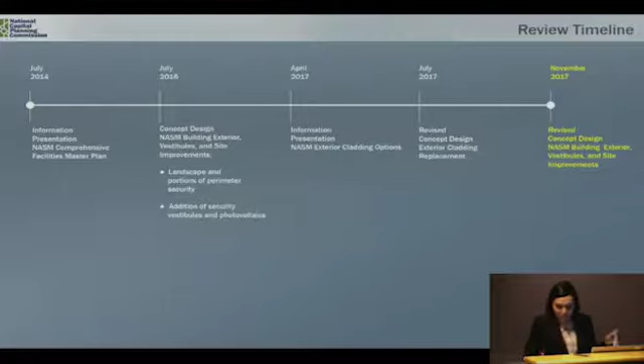So Smithsonian has submitted a revised concept design for the terraces, landscape, and security vestibules at the National Air and Space Museum. This submission is part of a larger revitalization project. Since 2014, the Commission has provided feedback on 2 information presentations and 2 concept designs, and as the Chairman mentioned, the Commission has also conducted 3 site visits to the museum.

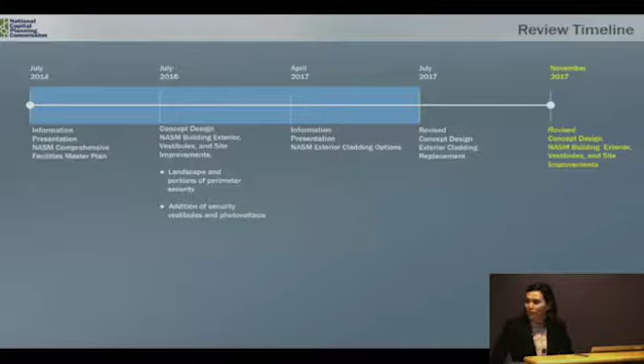In July 2016, the Commission reviewed the first concept design, which focused on the site improvements and security vestibules. Then, in July 2017, the Commission reviewed a revised concept that analyzed the building exterior stone cladding replacement options. Since the last review, Smithsonian has significantly reduced the project scope due to budget constraints. So today, we will describe the changes on the concept design, and the Smithsonian anticipates coming back for preliminary and final review in February 2018.

The project has 6 objectives: first, provide adequate waterproofing and structural support for the building; improve access and visibility between the museum and the National Mall; create a welcoming environment for visitors; provide programming on the museum grounds; reinforce the landscape; and accommodate increased visitation growth.

Here is the existing site plan. If you recall, the museum site is approximately 10 acres. The building sits on a terrace surrounded by planters, which respond to topography changes.

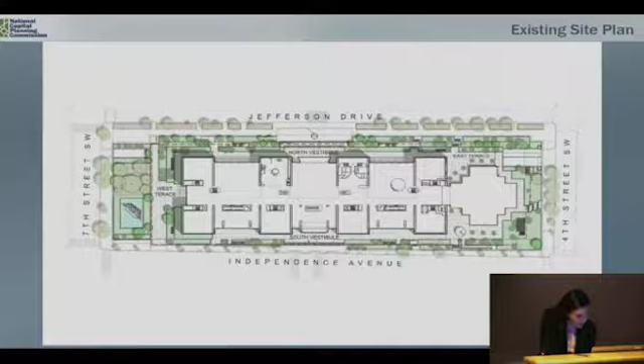So the topography of the site generally slopes from southwest here to northeast here. The southwest is the highest point and is at the same level as the sidewalk, the 7th Street sidewalk, while the northeast corner is the lowest point, and you can see there the terrace is about 6 feet in height. Stairs and ramps provide access to the building from the street level.

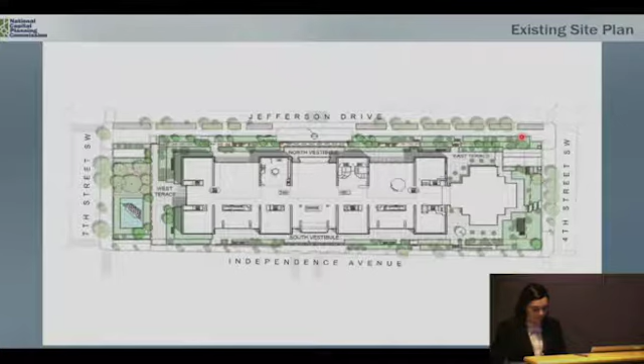The building terrace, which you can see highlighted in blue, must be replaced to address waterproofing issues affecting the underground parking. The red dashed line shows the extent of the basement footprint.

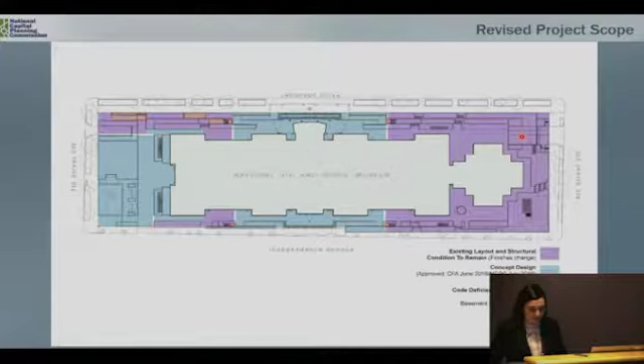So here is a diagram of the revised project scope. The blue color represents the extent of the changes to the existing terrace, which now focus on the north and south entrances at the center of the site, and also the west end of the site. The purple color shows the existing areas that will remain.

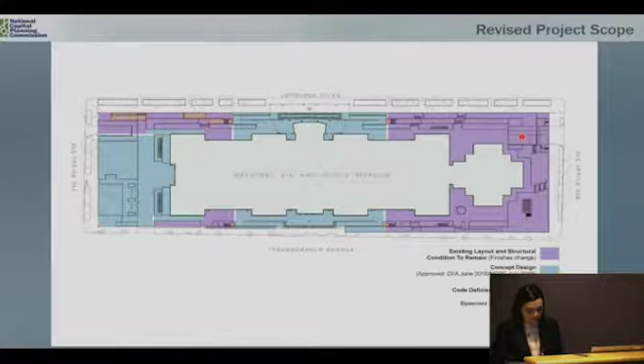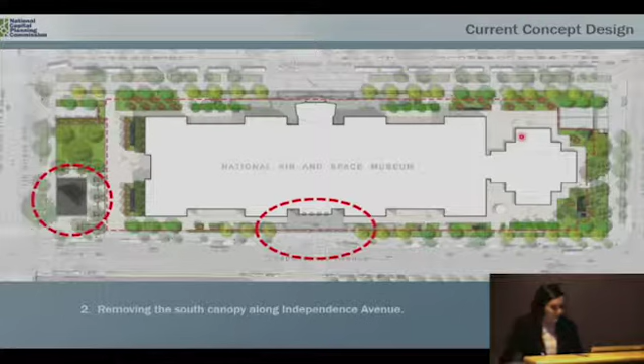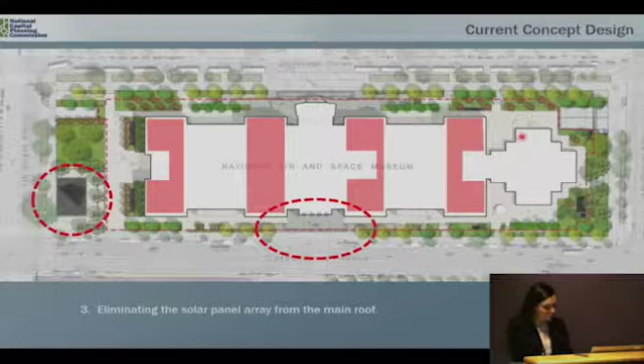The design team is now proposing 6 major changes to the previous site plan based on value engineering. The changes include: eliminating the fountain of the Delta Solar sculpture, changing the sculpture setting from a wet to a dry plinth; removing the south canopy along Independence Avenue; eliminating the solar panel array from the building's main roof; removing the corner entry plazas, in particular on the east end of the site; increasing the tree spacing, as you can see here, which results in fewer trees; and revising the terrace paving materials.

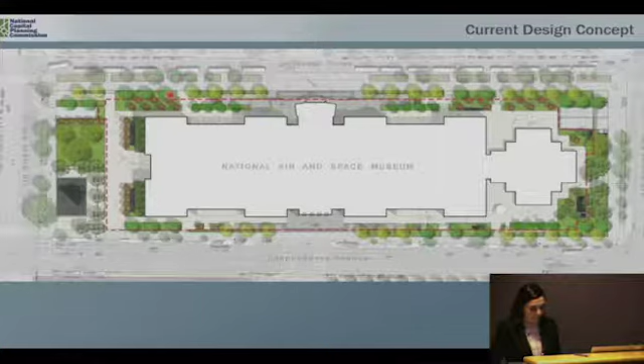Here is the latest plan. As I mentioned before, the tree spacing has increased from 30 to 45 feet on center to provide better growth conditions and solar access to the ground plane. As such, fewer trees are proposed in this concept.

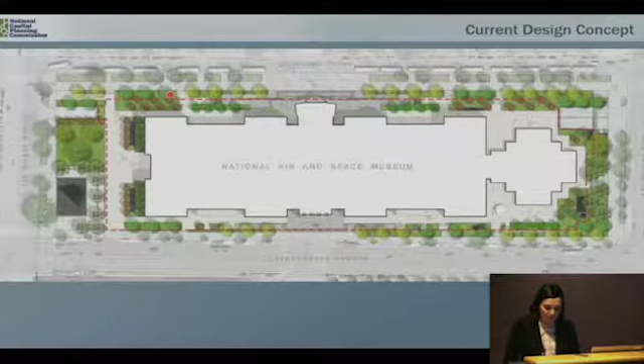So now, as I explain the design in more detail, I will share our analysis. The staff analysis has been organized in two main categories: the west end of the site and the overall site.

Moving on to the west end of the site, staff finds that the west end, which contains the Delta Solar sculpture, presents a significant opportunity to provide an active plaza space for the 7 million people who visit the museum per year. If successfully designed and programmed, the hardscape plaza could serve as an effective counterpoint to the expansive lawn of the National Mall and contribute to the experience along 7th Street, which directly connects downtown to the waterfront.

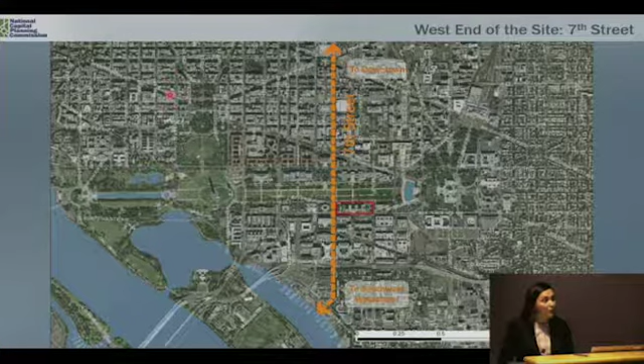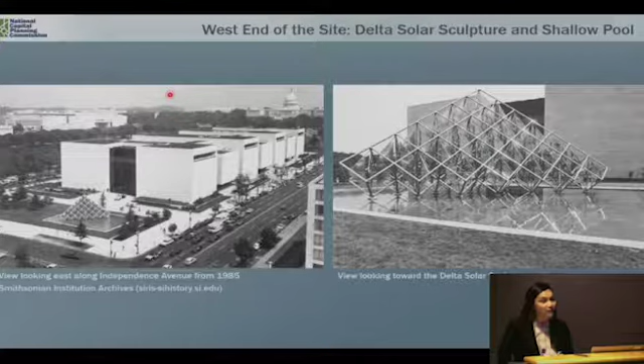Here you can see pictures of existing conditions. You can see the empty, shallow pool.

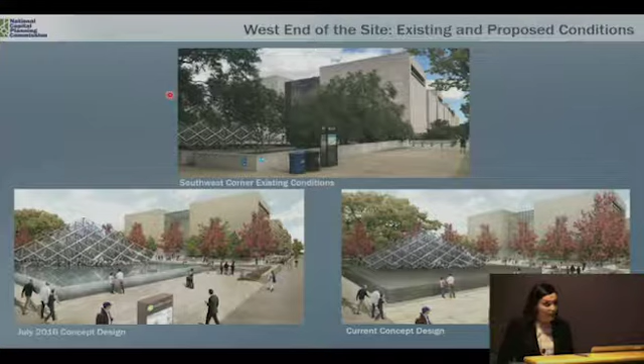Staff notes that the July 2016 concept design, shown on the bottom left, included the relocation of the Delta Solar sculpture closer to the corner of Independence Avenue and 7th Street. The proposal included the replacement of the shallow pool with a plinth that had a similar proportion to the original pool. The plinth functioned as a water feature and an integrated perimeter security measure for the base of the sculpture. The picture on the bottom right shows the current design. As you can see, the water feature has been eliminated, but the proposed plinth remains in the same location as the previous design.

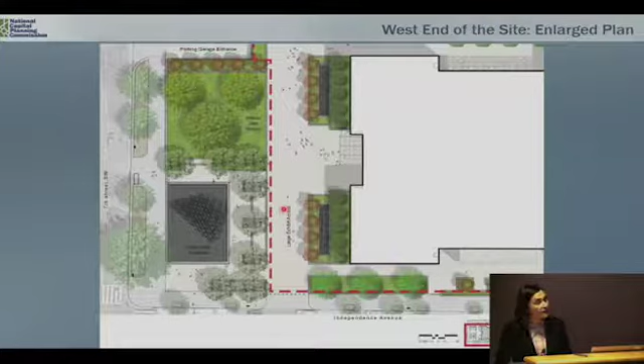Staff also notes that since the project submission to NCPC and the Commission of Fine Arts review two weeks ago, the Smithsonian has committed to retaining a water feature for the Delta Solar, which will be incorporated into the preliminary and final design. I note that we have reflected this change on page 4 in the amended EDR.

However, staff's recommendation regarding the design of the plaza is still relevant. Staff recommends that the Smithsonian consider how this portion of the site could reinforce the network of active gathering spaces along 7th Street and provide an amenity for the visitors of the museum.

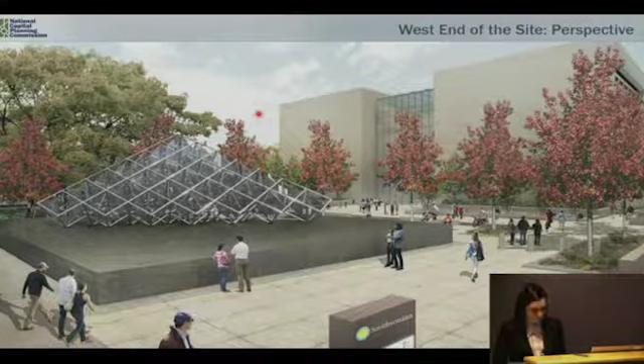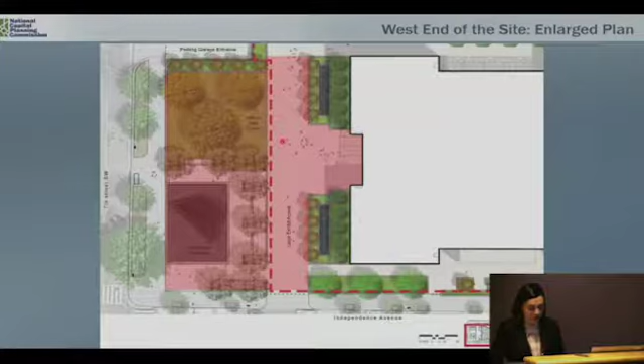We also recommend an integrated public space that incorporates the adjacent large exhibit access area, which is here, as part of the plaza composition, as indicated in red. Staff also recommends the Smithsonian evaluate the perimeter security along 7th Street at this edge to allow greater accessibility and visibility into the plaza and integrate elements that also function as public amenities.

Moving on to the overall site. As you may recall from previous site visits, there is a lack of seating around the perimeter of the site and not enough bike racks.

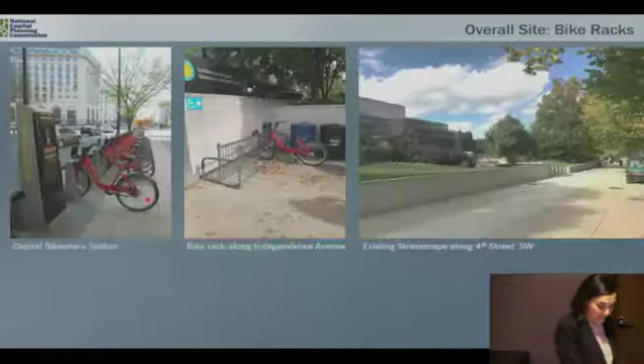As the design develops, staff requests a streetscape plan that incorporates the following amenities: benches located near bus stops, building entrances, and terrace corners at the sidewalk and terrace levels, bike facilities such as bicycle racks and a Capital Bikeshare station. Staff also recommends that the Smithsonian work with the National Park Service to improve the streetscape surrounding the museum consistent with the National Mall Streetscape Manual where applicable.

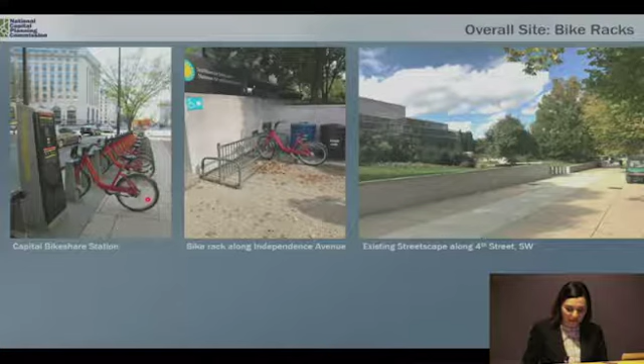The proposed design relocates the Ad Astra sculpture further to the north towards Jefferson Drive.

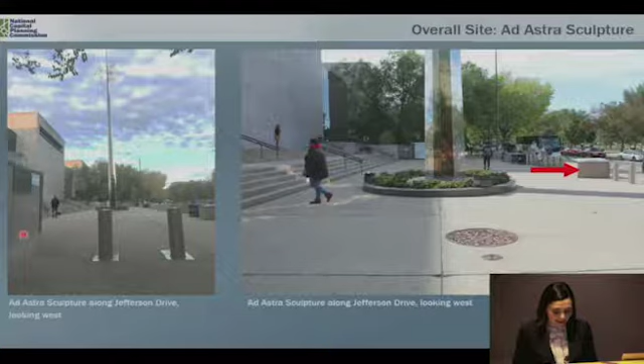The stairs will move further to the north to align with the existing terrace walls, and staff recommends that Smithsonian coordinate with NPS regarding the relocation of the Ad Astra sculpture to the sidewalk space along Jefferson Drive, ensuring that the placement does not disrupt pedestrian flow and provides sufficient clearance for bus drop-off and pickup areas.

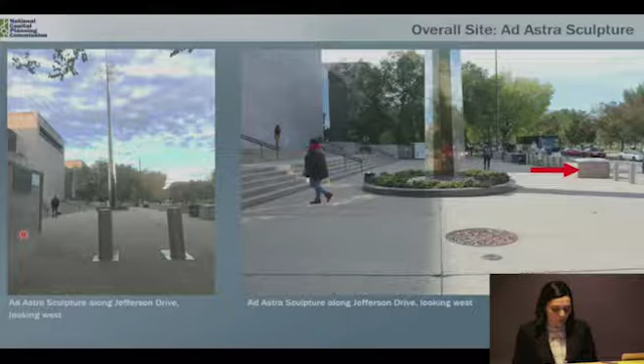Regarding landscape, staff notes that all paving, soil, and systems need to be removed to replace the terrace roof waterproof membrane.

147 of the 151 existing trees will be removed. 4 trees will remain, highlighted in red, located on the east and west ends of the site, outside of the basement footprint. The proposal includes planting 116 new trees, in addition to the 4 trees that will remain.

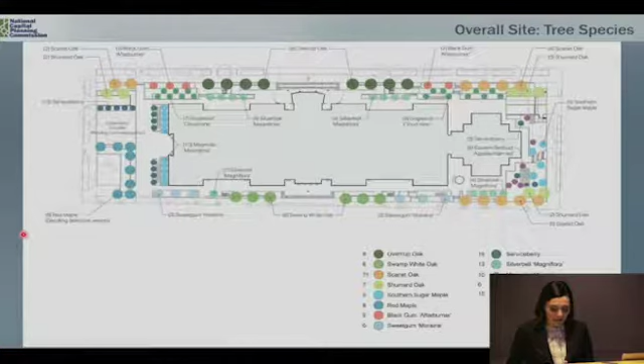This is 31 trees less than what currently exists today. Therefore, staff requests that the Smithsonian submit landscape plans at preliminary review that include tree replacement to prevent net loss of tree canopy, in accordance with the procedure established in the policies related to tree canopy and vegetation in the comprehensive plan for the National Capital.

In terms of paving treatment, the design team has revised the terrace paving material from granite pavers to exposed aggregate concrete in the areas shown in light gray. The dark gray shown at the museum entrances will continue to be granite. You can see an enlarged plan of the proposed pavement treatment.

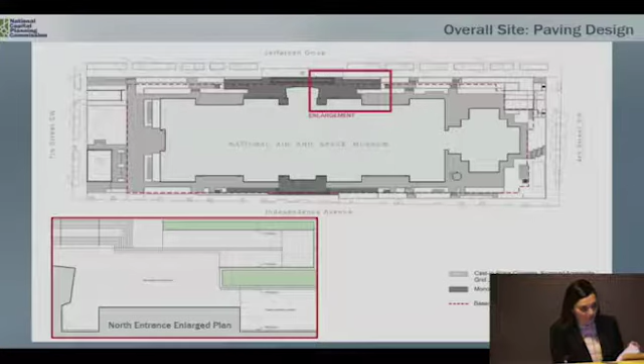I think it's frozen. Okay, thanks.

Moving on to the security vestibules, overall the north canopy continues to have the same form and materials. And the Smithsonian has provided an updated lighting approach that respects the Capitol at night.

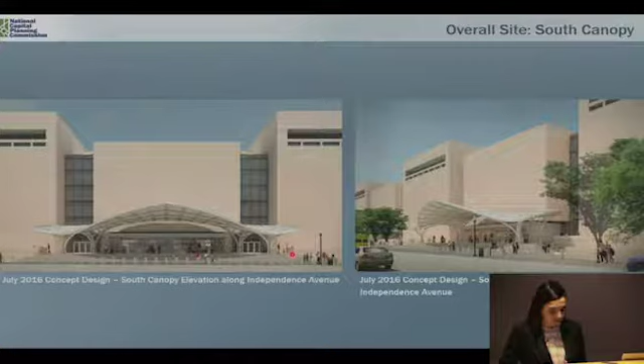You recall the last concept included a canopy on the south side of the museum. To accommodate the canopy, the Smithsonian removed the existing Continuum sculpture, which was placed there in 1976. The design no longer includes the canopy.

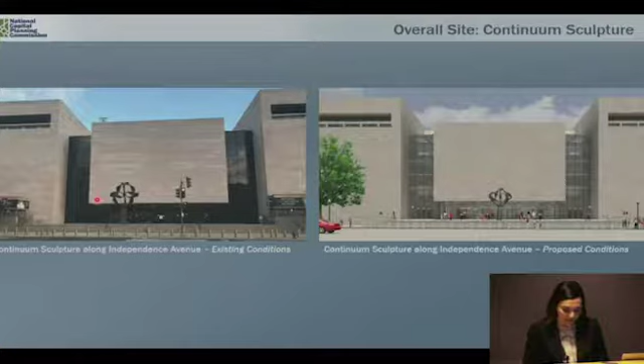The design team is proposing to keep the Continuum sculpture at the south entrance, but slightly relocate it to the center of the building. You can see that in the existing conditions, the sculpture is off-center and approximately aligns with 6th Street.

Lastly, the current design eliminates the solar panels previously proposed on the building roof, due to the potential impacts to the building structure and associated cost implications.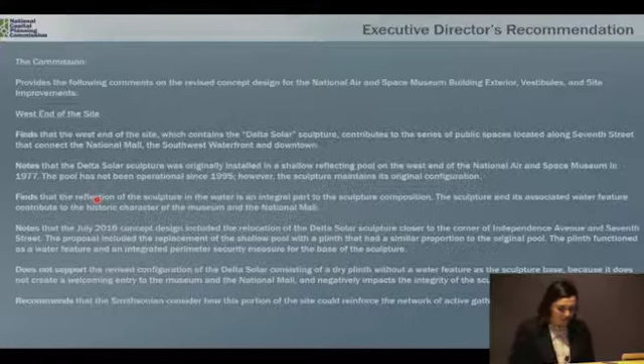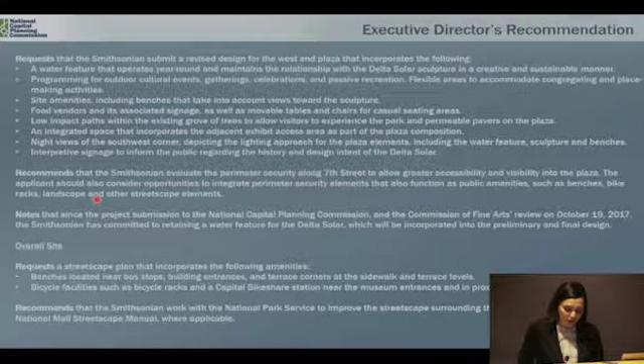To conclude, it is the Executive Director's recommendation that the Commission provide the comments discussed throughout the presentation, including those related to the Delta Solar sculpture and improving the plaza at 7th Street and Independence Avenue, by incorporating additional site amenities, a year-round water feature, and expanding the plaza to incorporate the adjacent exhibit access area.

Notes that since the project submission to NCPC and CFA's review on October 19, 2017, Smithsonian has committed to retaining a water feature for Delta Solar, which will be incorporated into the preliminary and final design.

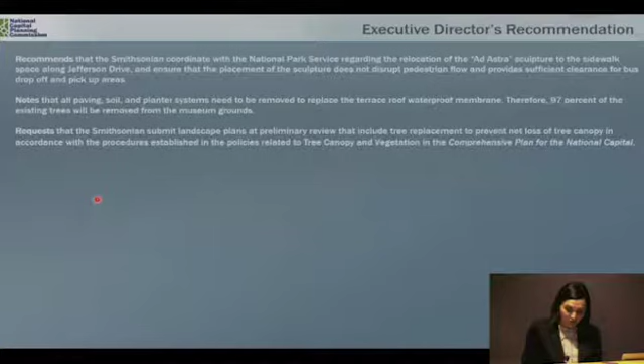Regarding the overall site, we request a streetscape plan that incorporates site amenities such as benches and bicycle racks. We recommend that Smithsonian coordinate with NPS to improve the streetscape surrounding the museum and the relocation of Ad Astra. We also request Smithsonian submit landscape plans that include tree replacement to prevent net loss of tree canopy, in accordance with the procedures of the comprehensive plan.

And with this, I conclude my presentation. I'm available for questions the Commission may have, and the design team and Smithsonian are here.

Thanks. Thank you, Ms. Lee, very much. Are there questions or comments? We note that Ms. Trowbridge and her team are here, and I would hasten to remind you that, as Ms. Lee noted, there is an addendum to page 4.

Mr. Shaw. Thank you, Mr. Chairman. I have a question on the solar panels. Is there a way for us to approve them, so that if you don't use them, they're still approved if you ever want to use them in the future? With administration priorities around these things, it seems like something you'd want to have approval for at some point, rather than coming back to us to approve something you could have had approved already. Does this make sense?

Okay, I'm saying keep the authorization if you can. I'm concerned that even if you don't build it, you could have built it, and we knew you could have built it—so can we keep you having the chance to build it?

Can we give you more flexibility? That was a very nice way of saying it. Please allow us, that's why you're...

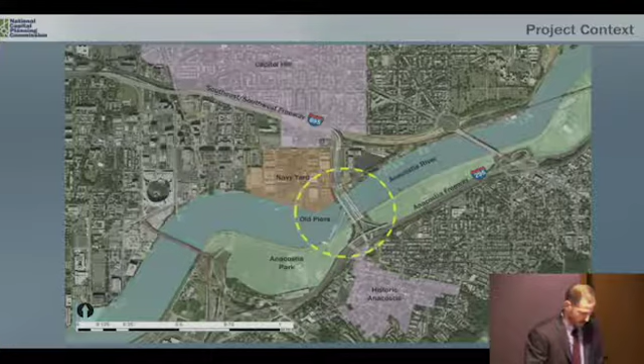As a reminder, the park will be located in southeast Washington, D.C., highlighted here circled in yellow. This is immediately south of the Navy Yard and just north of Anacostia Park, which is controlled by the National Park Service, as well as historic Anacostia. The project goal seeks to reuse the existing piers from the old 11th Street Bridge, which cross the Anacostia River at this location, and create a new civic destination in a park that connects the surrounding communities.

By way of history, the Commission in 2011 approved the final design for the replacement of the old 11th Street Bridge. That project replaced a pair of 40-year-old bridges which crossed at this location to allow for safety enhancements and new ramp structures. You can see here the plans for that project which the Commission approved. On the left you can see that old configuration, and on the right, the new bridge configuration, which has since been built and is operational.

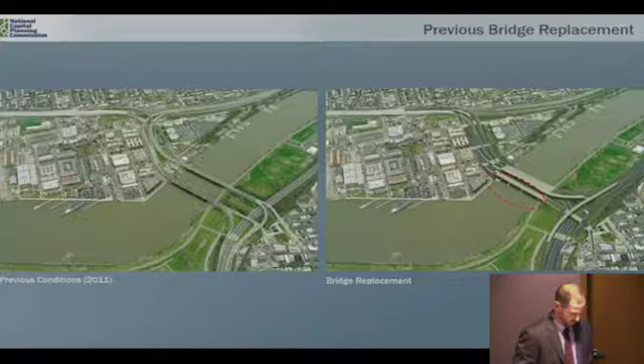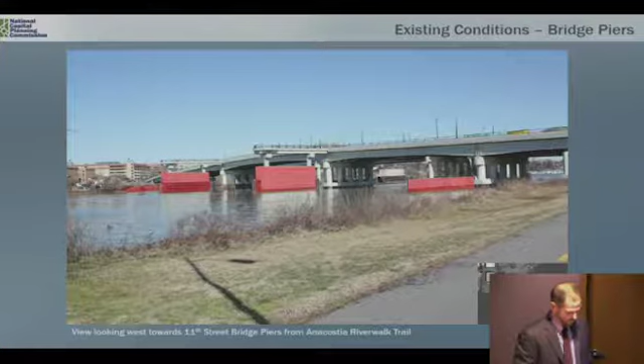The old downstream bridge infrastructure, circled in red here, is the site of the proposed bridge park. This view from the river shore shows the Anacostia Park, where you can see the existing piers, highlighted in red. Following the information presentation, the project team conducted a feasibility study to further the design and also evaluate those existing piers. Through that study, DDOT found that the piers were in good condition. However, the loading demands expected by the initial design exceeded their capacity. As a result, the park design has been modified due to these changes, but also as the project program and other needs have been identified and developed.

The proposed park, to give some context, will be accessible via a variety of different transportation modes. The Anacostia and Navy Yard metro stations are both about a 20-minute walk. Of course, bus service is pretty frequent in this area as well.

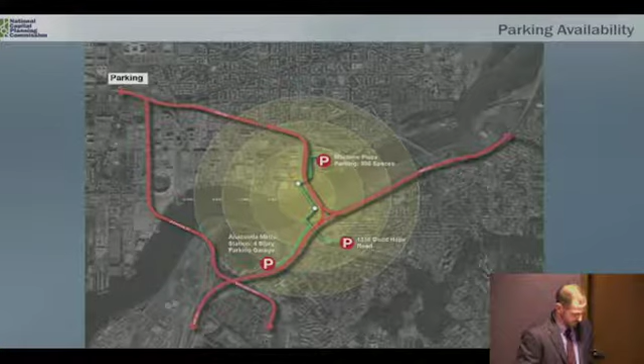No new parking will be provided for the park. However, there are several parking garages in the area, including the Anacostia metro station, which is to the southwest.

The park has 4 goals, which you heard previously: creating a healthy community by establishing a safe place for residents to exercise and play, connecting the community to the Anacostia River, connecting the neighborhoods of Anacostia, Fairlawn, Capitol Hill, and Navy Yard, and also generating new jobs and economic activity.

From the beginning, community engagement and feedback has been a critical part of the design process in developing principles and programming concepts. The Bridge Park, therefore, symbolizes a new connection across the river, stitching together booming areas of the city and those that had been previously overlooked. The park is also an example of the city working together with residents to create this new vision.

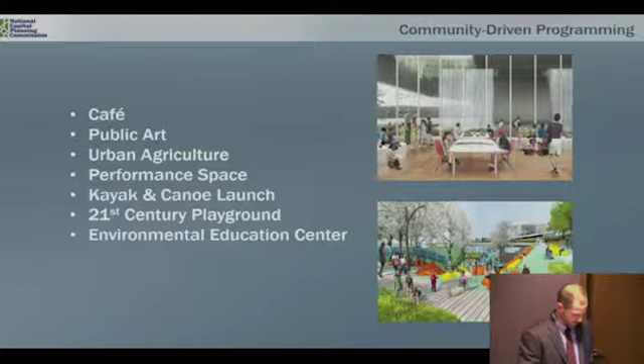Through the engagement process, a number of proposed uses were identified, and these are listed here on the screen in front of you. These have been incorporated into the park design, including outdoor performance spaces, public art, playgrounds, urban agriculture, and classrooms.

In March of 2014, the 11th Street Bridge Park staff organized a nationwide competition, which was in part informed by those over 400 community meetings. Over 80 design firms submitted proposals, and after several months of the selection process, the competition jury selected the design by OMA and Olin.

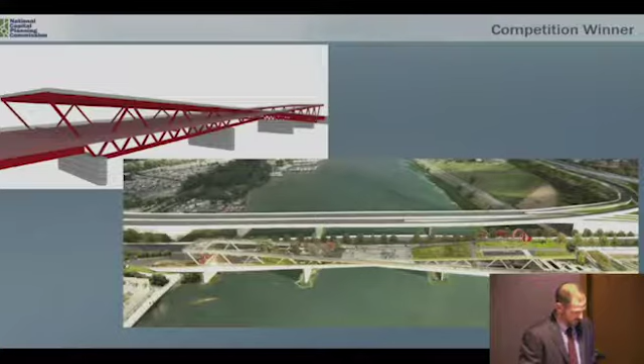As I mentioned, the project team conducted a feasibility study of that winning entry and has further evaluated the existing piers. The resulting design, which I'll walk you through today, is substantially similar to the original concept, with the major project components retained, but the design has been slightly modified.

So for comparison, I'll walk you through a few slides. First, an aerial view of the winning design. And then here's the current design. You can see the bridge has been narrowed somewhat.

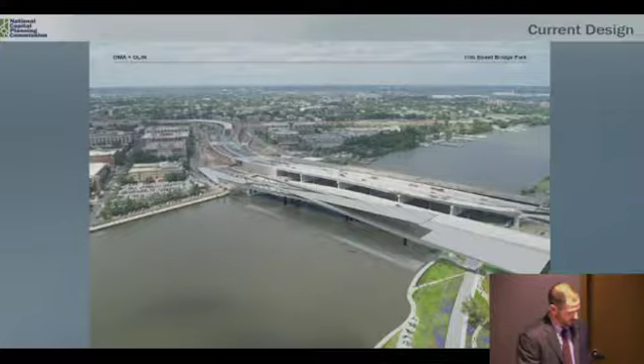Here's a rendering of that winning design, looking basically to the north. And then here again is the new design, very close to the winning entry, just narrowed slightly. Here's a view looking from Anacostia Drive to the north, and then here's the updated concept, which is before you today.

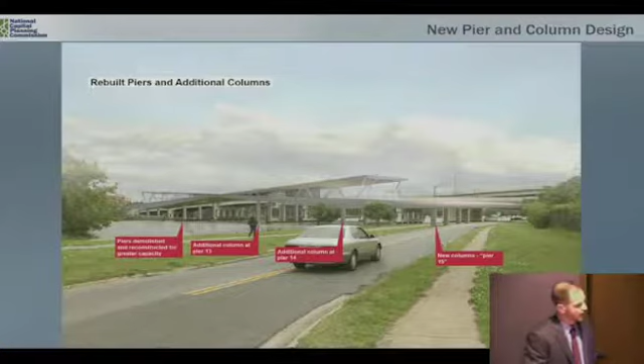Again, based upon that feasibility study, a new multi-column pier as well as 2 additional support columns have been added to the bridge structure to help support the overall program.

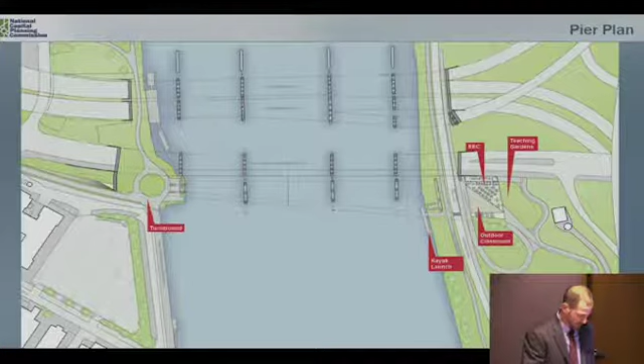Walking quickly through the components of the plan, I'm going to start at the roof level. This includes gardens, lookout areas, as well as open gathering spaces. The bridge deck level will incorporate an amphitheater, cafe, and play space. And then at the pier level, where it interfaces with the ground, the park will include park space, an education center, outdoor classroom, as well as a kayak launch area.

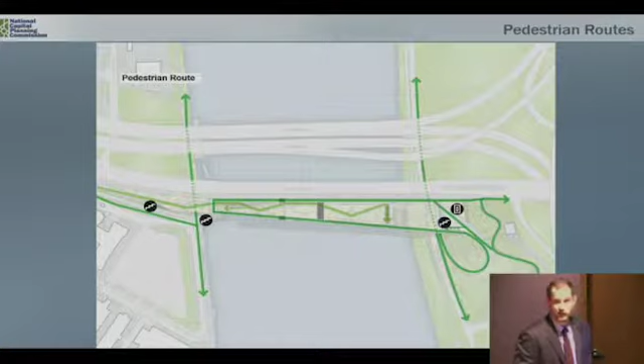The revised design concept also further promotes pedestrian and bicycle access. From the north side, pedestrians will access the bridge from the landing adjacent to the Navy Yard, as well as the existing 11th Street Bridge. On the south side, the bridge connects to the adjacent grade, and paths and ramps allow access down to Anacostia Drive, Good Hope Road, and Martin Luther King Jr. Boulevard. On the screen here, you can see highlighted in green those access routes.

Staff believes both the north and south bridge landings are critically important to allowing access to the park. These connections should be clear, safe, and comfortable for all park users. We understand that the applicant is going to continue to develop the details for these connections prior to preliminary and final review by the Commission. In particular, the pedestrian bicycle connections from the bridge across Anacostia Drive in that area should be improved, as the trail is located north of a road and would require a crosswalk at grade.

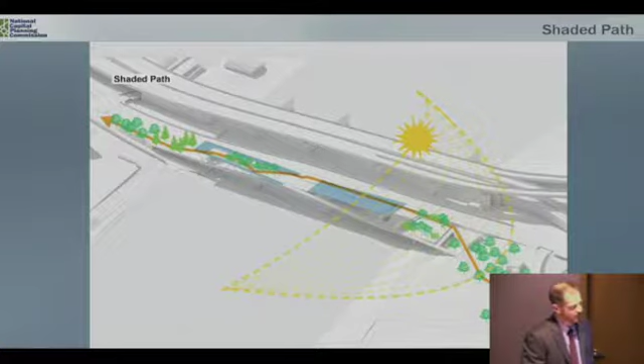Because the bridge is elevated, another important issue is protection from the sun. The team has therefore emphasized a shaded route across the bridge, including both built elements as well as landscape features to provide that path.

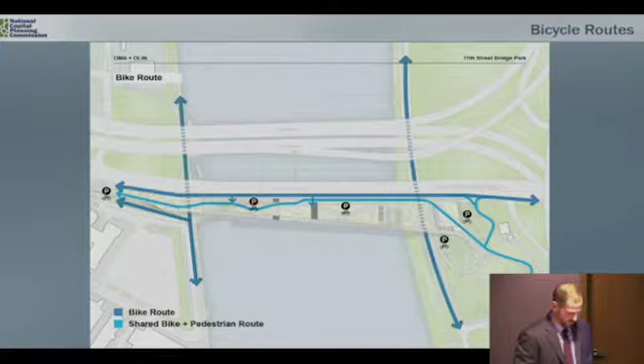Through bicycle access will be primarily along the existing 11th Street Bridge, which is on the top part of the image, although a shared bicycle pedestrian path will allow direct access to bridge programming. Connections will allow both bicycles and pedestrians to cross over from the existing bridge to the bridge park. Here's another view that shows those connections, so the grades have been reconciled at these locations to allow that interface to happen.

In addition, the design has been updated to provide clear routes for emergency egress and life safety, and those are diagrammed here. These are additional program analyses that have happened since you last reviewed the project.

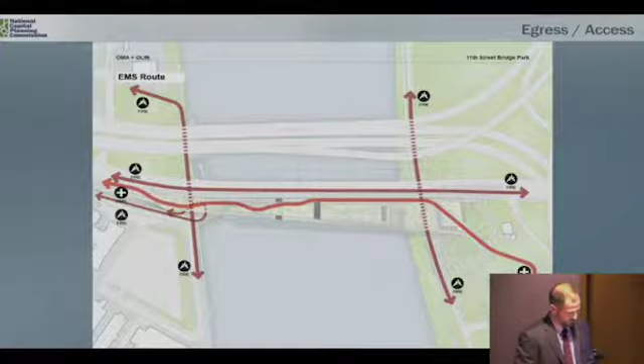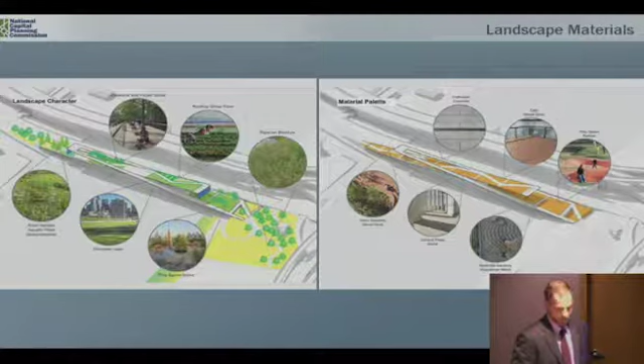Finally, as the design is further developed, additional information regarding the proposed lighting strategy will be particularly important. The bridge will be seen from a variety of locations at some distance, and as such, the lighting level should be appropriate to meet the design needs while minimizing excess light, as well as upward and horizontal light spillage. Staff recommends the applicant prepare a lighting plan, including fixture details, color, illumination, and renderings for inclusion in the next submission.

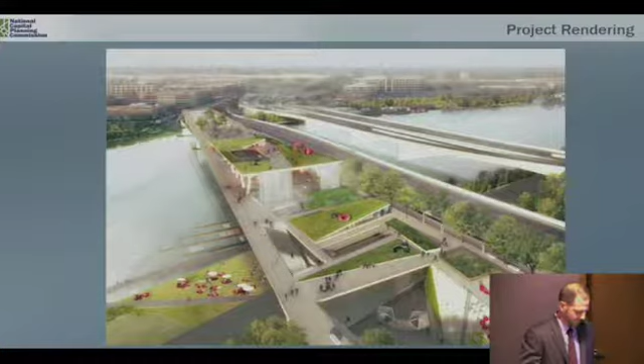The proposed bridge park intends to create a welcoming and vibrant space that enhances the user experience and fosters civic and local uses. Staff finds that this is consistent with many of the policies in the comprehensive plan. A high-quality public realm will reinforce Washington's national image, as well as everyday experiences for residents and visitors. The park will also promote waterfront access and highlight the Anacostia River's recreational, ecological, and scenic qualities.

I'll also note that the Frederick Douglass Memorial Bridge, also known as the South Capitol Bridge, is located less than a mile downstream. It is also going to be rebuilt with a new contemporary design. Both these bridges reflect a renewed emphasis on Washington, D.C. as a riverfront city.

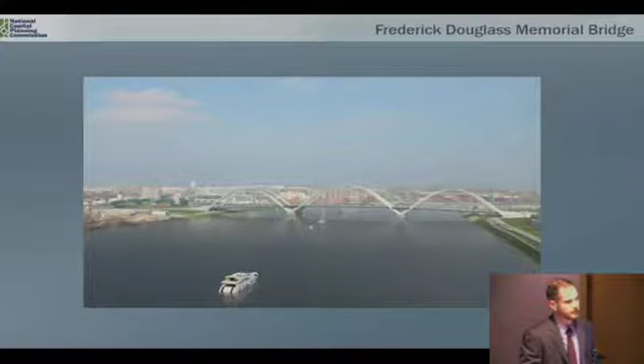Finally, the project team has coordinated with a number of federal and local agencies, as well as the surrounding communities. Staff commends this outreach thus far and suggests those efforts continue as the project advances. We do recommend further coordination with the Department of Navy regarding any security impacts to the Washington Navy Yard on the north. On the south end, the applicant should continue coordinating with the National Park Service on elements within and adjacent to Anacostia Park, including the pedestrian and bicycle connections mentioned earlier in the presentation.

I'll also note that the applicant is still refining the limits of the project, and if any transfers of jurisdiction are necessary between the Park Service and the district, those will need to come back before the Commission for review and approval.

Therefore, it is the Executive Director's recommendation that the Commission comment favorably on the proposed 11th Street Bridge Park, noting that the park will increase community connectivity and create welcoming and vibrant spaces that enhance the user experience and foster civic and local experiences. It recommends the applicant prepare a lighting plan, including fixture details, color, and illumination levels. It requests the applicant continue to coordinate with the Department of Navy and the National Park Service, and notes that any transfers of jurisdiction from federal to district control will require review and approval by the Commission.

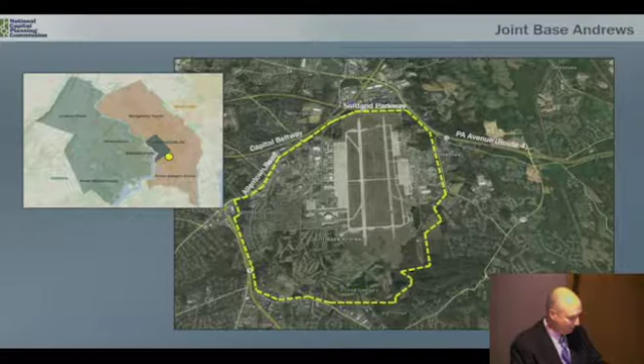Good afternoon, Mr. Chairman and members of the Commission. The Navy has submitted concept building and site development plans for the new Consolidated Communications Center on behalf of the Air Force. The project is located at Joint Base Andrews in Prince George's County, Maryland. Joint Base Andrews spans 4,400 acres in central Prince George's County, bordered by Allentown Road on the west, Pennsylvania Avenue or Route 4 on the east, and Suitland Parkway to the north. The installation has a daytime worker population of approximately 17,000, a residential population of approximately 2,600, and is home to organizations from the Department of Defense, Maryland National Guard, Maryland State Police, and District National Guard.

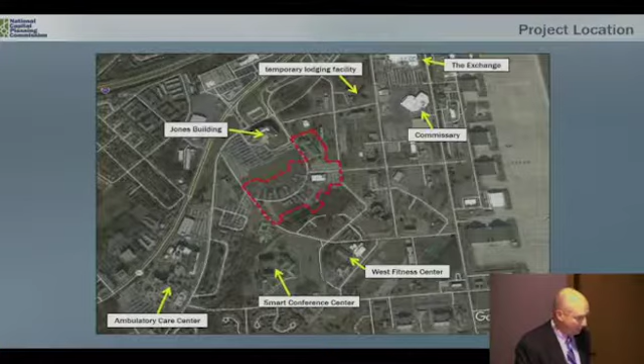The 25-acre Consolidated Communications Center site is located in the main administration district on Joint Base Andrews, which has a variety of uses including the Exchange, Commissary, a nearby fitness center, a conference center, and the Jones Building, which serves as the installation headquarters. The site now has a number of older light industrial and maintenance service buildings that are currently vacant since their functions have been relocated to other sites on the installation.

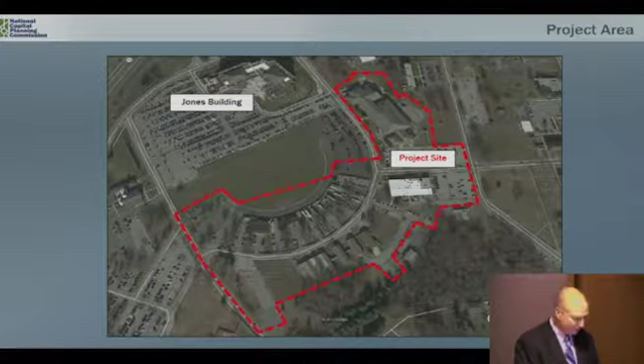Also included in the project limits are the two buildings, Building 1539 and Building 1558, which currently house the various communications operations that will be consolidated into the new communications center building.

The project will be implemented in two phases. Phase 1 will demolish the current older on-site service buildings and construct the new communications center building along with its surface parking lot and other various site improvements. Phase 2 will demolish buildings 1539 and 1558 and return these sites to open green space.

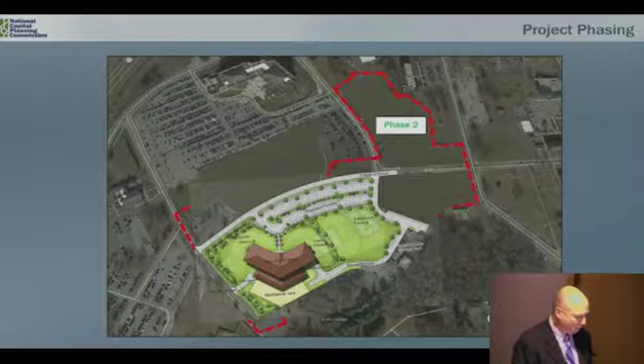The new communications center building is situated near the existing communication functions to allow the new center to reuse existing underground utilities, which would be prohibitively expensive to extend to another further away location on Joint Base Andrews.

Here's a close-up of the new consolidated communication center site plan with a proposed 300-space surface lot, mechanical yard in the rear of the building, decorative perimeter fence, loading, unloading access, and landscaping.

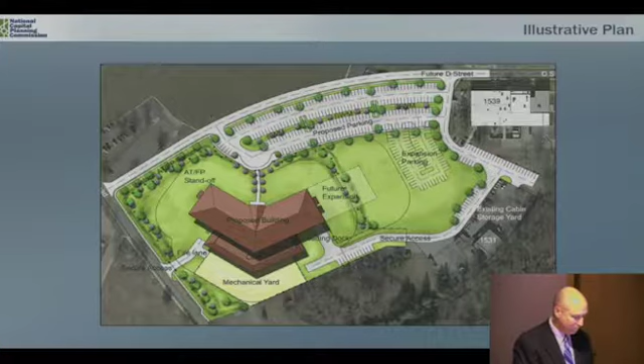The plan currently shows minimum 82-foot setbacks from all adjacent parking and roadways around the entire building. Of the 300 new parking spaces, 278 will be reserved for building employees pursuant to Air Force standards, with the remaining 22 spaces reserved for government vehicles, visitors, and ADA parking.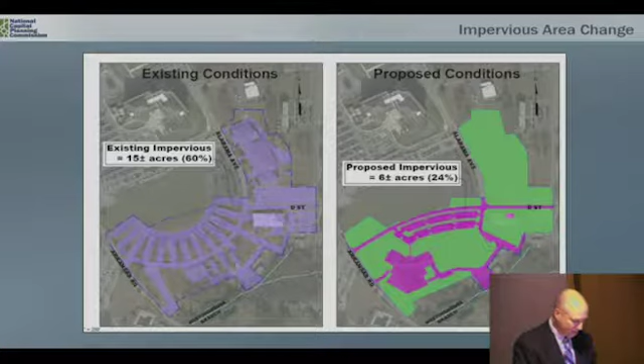Overall, the project will reduce impervious surface area within the site by approximately 60%, from roughly 15 to 6 acres. Also, on-site surface parking within the project limits will be reduced from a total of 556 to 300 spaces.

Staff analysis of the project concept consists of 2 parts: comments related to the project site's overall context and comments pertaining to the site itself. Typically, staff would develop comments based on an up-to-date installation level master plan. However, the last commission-reviewed master plan for Joint Base Andrews is from 1990, which was 27 years ago.

The Air Force is currently in the process of developing an updated master plan for the installation, and they will submit the plan to NCPC for review in the near future. However, the applicant has requested concept comments from the Commission in advance of the Air Force's revised master plan submission in light of the Communications Center's project schedule.

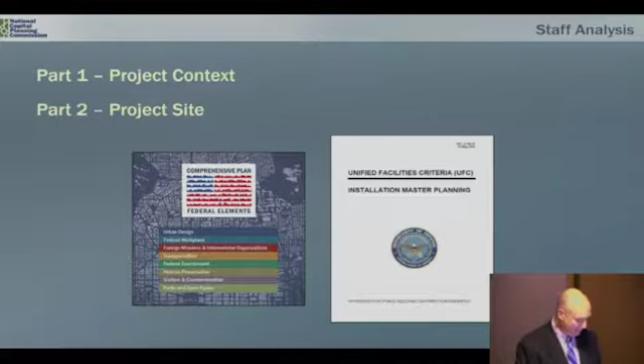As such, in lieu of the recent master plan, NCPC staff developed comments for the project based on regional planning policies from our comprehensive plan, with guidance from Department of Defense policies from the Installation Master Planning Unified Facilities Criteria, or UFC. As background, the UFC provides a set of sustainability-oriented planning policies for development of all Department of Defense master plans within the continental United States.

Their intent is to promote efficient use of military resources through compact, mixed-use, multimodal development. The UFC sets policies that guide stakeholder involvement, setting goals and objectives, installation-wide network planning and smaller-scale area development plans, and metrics to assess master plan performance.

Regarding the project's planning context, the Commission requires an up-to-date master plan to provide future development goals and objectives for the installation so that we can see how the new Communications Center building will reinforce these.

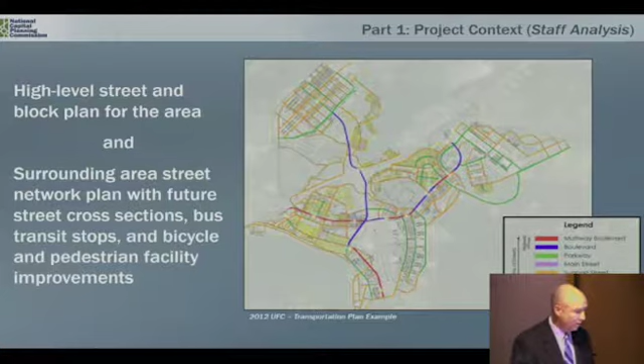Street cross-sections, transit stops, and bicycle and pedestrian improvements help provide the Commission with the site's larger context. Again, this type of information is illustrated on the slide before you with a graphic that is borrowed directly from the UFC.

While the project submission states that there is a plan to realign several streets within the area as shown on this graphic, without a more recent master plan, we do not have enough context to determine whether this is advisable or not.

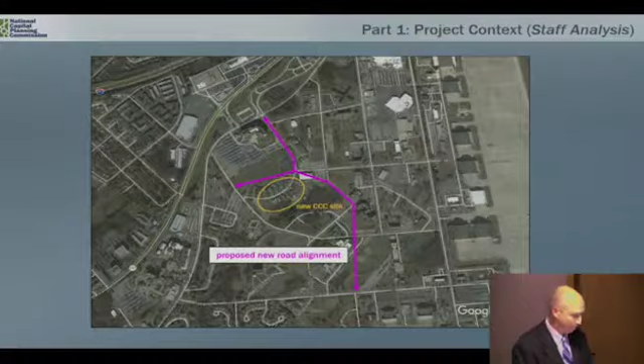Existing parking utilization and future parking facility locations will be necessary to help identify potential shared parking opportunities, and this may allow the Air Force to more efficiently use on-site infrastructure and reduce impervious area to achieve various DoD sustainability goals. Finally, the Commission needs to understand how the new communications center site will fit within the larger planning district's landscape and open space network, and how the project will reinforce installation stormwater management goals and NCPC policies related to trees and vegetation.

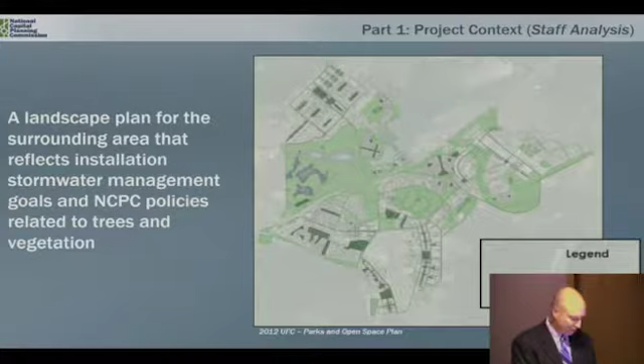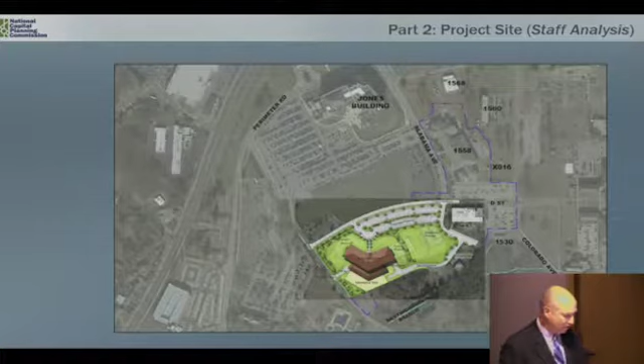You will see each of these items requested in the final Executive Director's recommendation at the end of the presentation. The second part of our concept comments pertains specifically to the new communications center site, based on NCPC comprehensive plans and guidance from the Department of Defense UFC for installation master planning related to compact, low impact, multimodal transportation and structured parking.

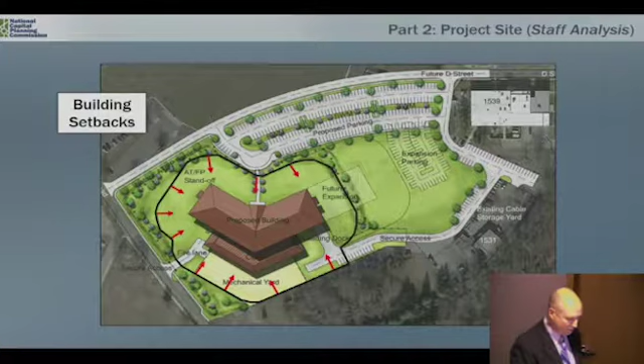Our first recommendation is that the applicant should consider meeting the new building's parking requirements either through nearby shared parking opportunities or through a new garage, possibly located in the rear of the building, to help better integrate the building site with future nearby development. If feasible, the building should be designed with smaller setbacks due to its location on a secure installation, which will help reduce the project footprint and allow easier integration with nearby more compact development, with a potential adjusted location closer to the street. The project should install on-site bicycle racks and include showering locker room facilities in the new building to maximize the convenience of bicycling.

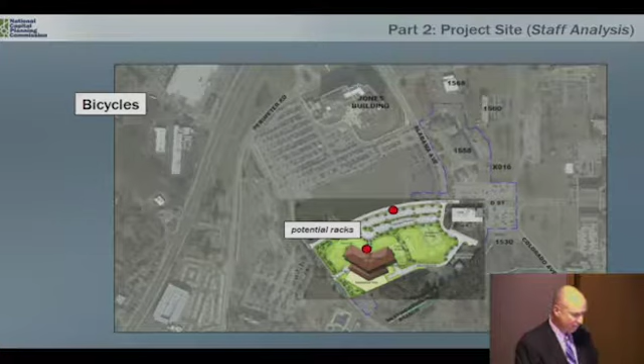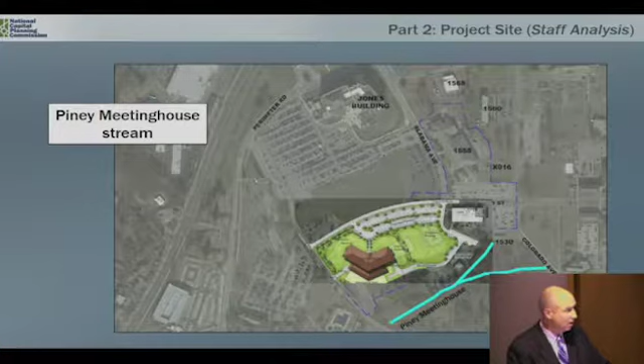Reserved carpool, vanpool parking should be identified nearby either on or off-site to encourage multi-occupant vehicle use. The project driveway should be designed with transit in mind to help support potential service on Joint Base Andrews in the future. And to echo a project-related referral comment received from Prince George's County, we're recommending that the project be designed in a manner that prevents adverse water quality impacts to nearby Piney Meetinghouse branch stream, and the applicant should highlight this in the next project submission through its landscape plan.

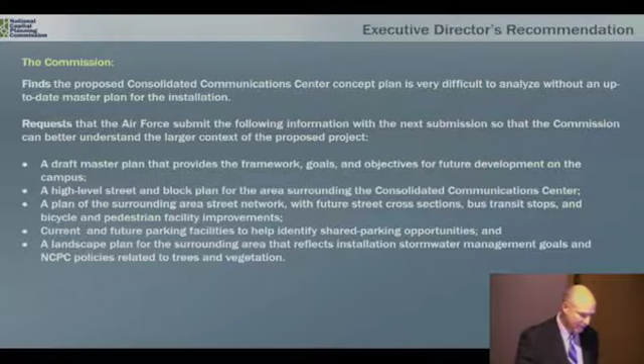So with that, here is the Executive Director's recommendation: to find the Consolidated Communication Center plan difficult to analyze without an up-to-date master plan for the installation, and to request the following information as part of the next project submission to aid the Commission's understanding of the larger project context. An installation master plan that includes the framework, goals, and objectives for future development on Joint Base Andrews; a street and block plan for the area surrounding the project; a plan showing the future surrounding area street network with street cross sections, bus transit stops, and bicycle and pedestrian facility improvements; current and future parking facilities to help identify potential shared parking opportunities; and a landscape plan for the surrounding area that reflects stormwater management goals for the installation, as well as NCPC policies related to trees and vegetation.

Next, we recommend that the Commission find the Communications Center plan to be generally inconsistent with the goals and policies from the NCPC Comprehensive Plan and Department of Defense Unified Facilities Criteria for master planning, particularly those related to encouraging more compact, low-impact, pedestrian-oriented development and structured parking. We request a revised communications center building site plan that reconciles the proposed design with these comprehensive plan and UFC policies based on the following recommendations.

To use existing nearby parking facilities to accommodate the project's parking requirements, or through the use of a garage on the south side of the building to allow better integration with future area development; to design the site with smaller building setbacks in light of the project's location on a secure installation; to provide on-site bicycle racks and shower locker room facilities inside the new building to support bicycling; to identify reserved carpool, vanpool parking to encourage multi-occupant vehicle use; to locate the building driveway near the building's front entrance for use as a potential transit stop; and to design the project to prevent any adverse water quality impacts to Piney Meetinghouse branch stream.

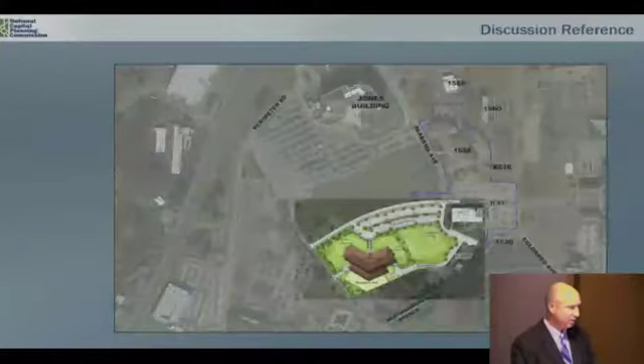So that concludes my presentation. I'm available to answer any questions, and we also have representatives here from the Air Force and the Navy as well who can speak to the project or the master plan.

Thank you, Mr. Weil, very much. Mr. Rhodes, we have a lot to do on this project. I'm sure, certainly the folks from Joint Base Andrews and the NAVFAC folks who are helping to manage the project can answer any particular questions. I do know there were a couple prior iterations on the master plan, and they were impacted by changes in requirements and procedures and started over, a couple fits and starts in the process. But the request for the master plan is not going to be any surprise to Andrews. They understand that, and I think they're positively moving forward to be supportive and responsive to staff, and that is my perception from communications I've had. Also, I think the feedback in the EDR is going to be very helpful to them.

While I do not know, in my mind's eye, that every single one of them will be incorporated into a modified plan, at least, at minimum, those points can be addressed and represented as to why, if it's not necessarily modified into a new plan coming forward, what the reasoning and rationale is. So that's going to be very helpful to them as they move forward and modify. I'd leave to them any other comments they'd have to some of the comments presented here today. Before we see if we have any comments, Mr. May, did you?

Well, I had a question. Yeah.